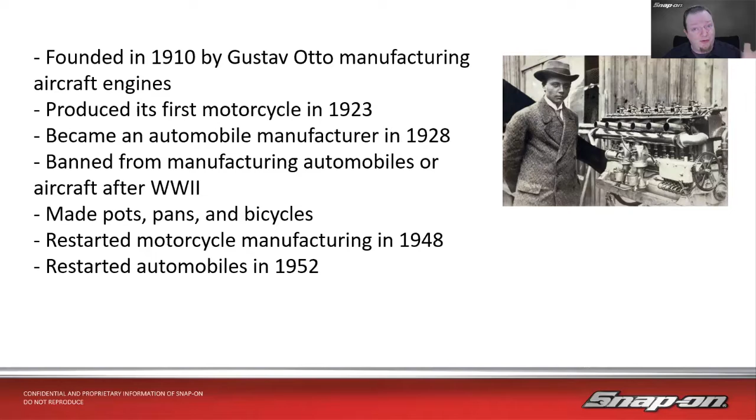It wasn't too long after that, though, only 3 years after the war was over, that they started motorcycle manufacturing again in '48. Then 4 years after that, they restarted automobile manufacturing in 1952. They still manufacture motorcycles and automobiles to this day.

Now let's talk about some of the models that we would be familiar with now. We're not going to talk about things like the 2002 from a ways ago. We'll talk about the ones we can currently see, and if you wanted to go to the dealership you could buy. Things like the 5 Series were actually introduced in 1972, the 3 Series in 1975, 6 Series in 1976, and the 7 Series introduced in 1978.

Of course, there was the X Series in there too, those are fairly newer. And then the 3 Series split off into the 3 and the 4 Series, maybe mid-to-late 90s, early 2000s. I don't remember exactly when it was, but it was 20-something years ago they split off there.

Also, they own Mini, so Mini Coopers, and Rolls-Royce. So you get your itty-bitty Mini up to like a really fancy Rolls-Royce, and anything in between, that's your BMW. Owns all of that. So some interesting little history there.

Some top models, this is based on North American sales because that's what we have the data for, over the last 10 years. Out of the three brands we've done so far, this is the top European manufacturer. But as far as sales numbers, we're not nearly anywhere near where we were with Toyota and Ford. The number one selling model was the X5, almost 600,000 over 10 years, so that's less than 60,000 a year. All the way down to the 2 Series, 94,000, and even the 7 Series, which has been around since the 70s, at 95,000. That's less than 10,000 a year for those on average.

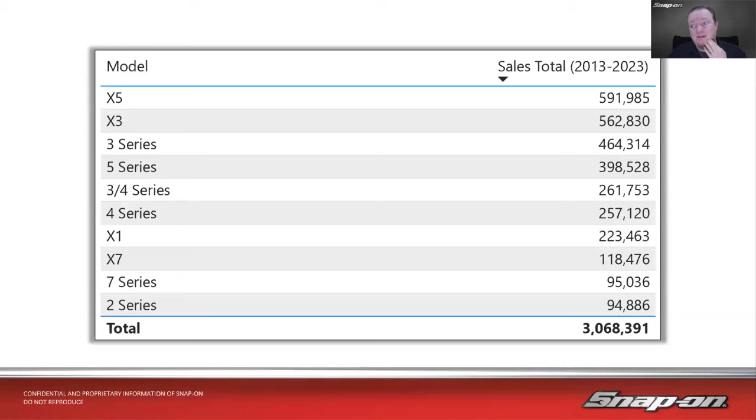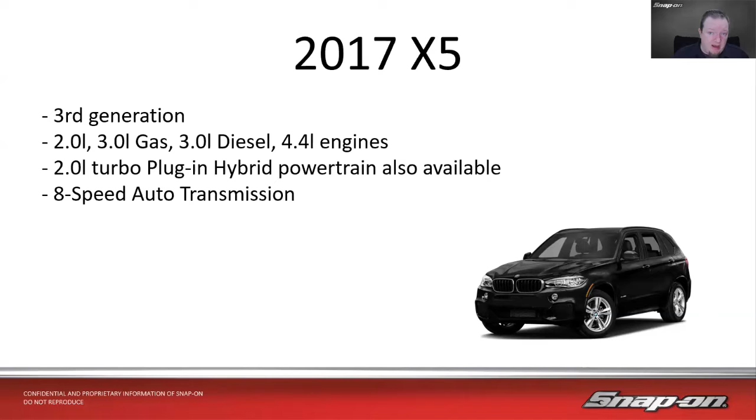So I picked out some representative models, kind of where they were at their peak over the last 10 years. The 2017 X5 was one of them, near one of the peaks there. The 2017 X5 was the third generation. It has a 2-liter and 3-liter gas, a 3-liter diesel, and a 4.4-liter engine. There's also a 2-liter turbo plug-in hybrid powertrain available, which was fairly new in 2017. 8-speed automatic transmissions is what that came with, no manual option to speak of, and of course the hybrid would have a hybrid type powertrain, not so much as a transmission.

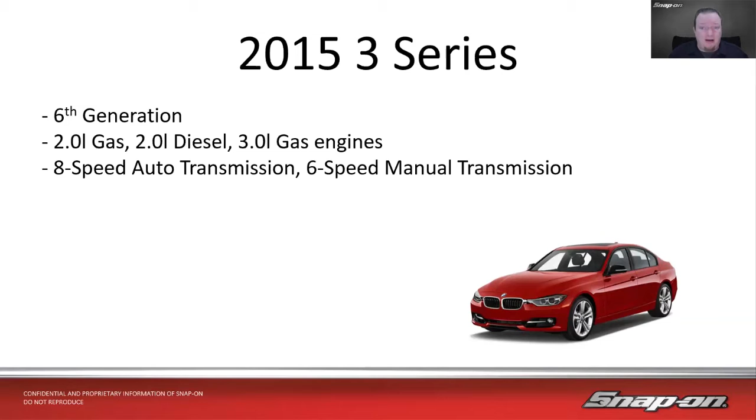2015 3 Series was another kind of peak year for that, 6th generation 3 Series. 2-liter gas, 2-liter diesel, and 3-liter gas engine. The 2-liter and 3-liter gas engines would be pretty much the same ones you'd find in the X5, so there's really not a lot of variables in between them. 8-speed automatic transmission and a 6-speed manual was offered there as well, and that's getting rarer and rarer, as I'm sure you know. Actually read an article the other day that said here's the list of vehicles you can still get with a stick shift, and it was a decent list still, probably a couple dozen vehicles that can still be had with it, but way less than it ever used to be for sure. So that's good to have.

And then 2016 7 Series. I picked this particular year because it was the highest North America and Europe sales volume of that year. It was 6th generation of the 7 Series, got a 3-liter, 4.4, and a 6-liter engine available, 8-speed automatic transmission. And as I said, the highest North America and European sales volume that year for the 10 years covered, of course, and to say it was the highest, it's still only not even 13,000 - it was 12,000 and change in each market. They weren't that far off, a couple hundred either way between North America and Europe, so probably a lot of factors involved in that.

I would imagine the first one's probably the price, because that's one of the top tier series for BMW, so I would imagine that's where all the fancy stuff comes in. You've seen the pictures of the new ones with the giant screen that goes across the whole back - yeah, it's a 7 Series. So all the high tech stuff, that's where it goes first, and usually it trickles down. So yeah, that's their top of the range, and that would be why I would imagine 13,000 a year at the peak.

So let's look at some common issues we've run into here, looking at the information available. Many occurrences of misfires, seems to be a lot of them on, say, the 3-liter, the N52s and such. They actually had a TSB back in the day that said, hey, if you find Bosch coils in these cars, you need to replace them with Delphi coils because we got a problem with the Bosch coils. So a lot of coil issues, misfire issues strewn about. EVAP issues we're going to see on pretty much any of them, and I think that's really across the board, doesn't matter what the manufacturer is. A lot of EVAP issues just in general, just because there's a lot of moving parts, so to say.

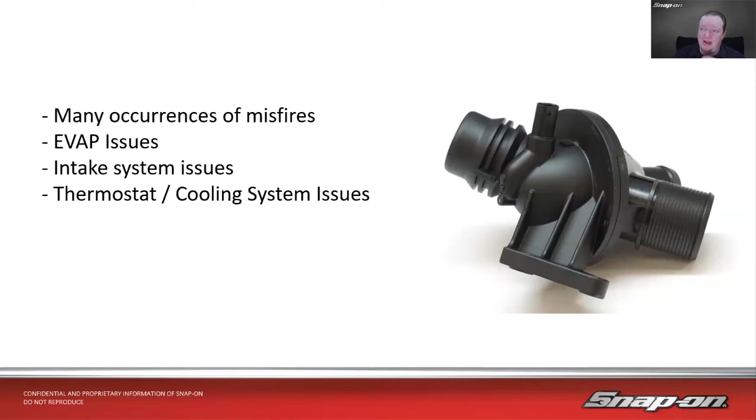Intake system issues from the intake manifold all the way down through the valves, and we'll see why when we talk about some specifics. Also a lot of thermostat and cooling system issues. They have an electric thermostat, a heated thermostat, they call it map cooling. We've talked about it before in one of these classes, but they set a fair number of codes on that, so that's what you're going to run into.

So here are some common codes. This was based off the top 3,000 some odd codes that we get on the scan tools that people have asked for more information on. Usually I try to get the top 10 from any manufacturer. BMW actually really only had 9 across the board, but close enough.

We can see things like throttle, boost pressure, charge air pressure control, variable cam timing, throttle valve, mixture control, intake, variable cam control, variable camshaft timing control. So a lot of those intake-type codes.

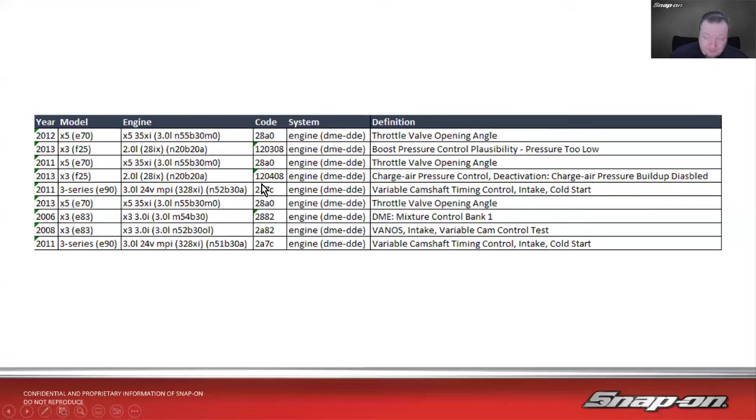Another thing you'll notice is that BMW will often present to the scan tool in a hexadecimal code format. They use hexadecimal, they use decimal, and they also have conversions for P codes, B codes, C codes that we'd be used to. But it actually presents it - the factory tool would present it through the Snap-on tool as that hexadecimal as well. Most times, sometimes you'll get into P codes, but more than likely it's going to be that hex code. So just be aware that that's another little oddball, unique thing with BMW.

Some OEM specific features, and this is where we come into some technology stuff. Valve train control, a lot of valve train control.

So this is Vanos, and what that does is your timing advance, oil controlled and all that. They do it pretty similar to how other manufacturers do it, so this isn't exactly the most exclusive one, but how they do it is kind of proprietary to them. It's not that different, but there are some interesting things that can be done with it, like there's a timing chain test in there - you can see how stretched your timing chain is, which is kind of nice, through the scan tool. We'll talk more about that in a little bit, but that is one of the things we're going to talk about, the Vanos.

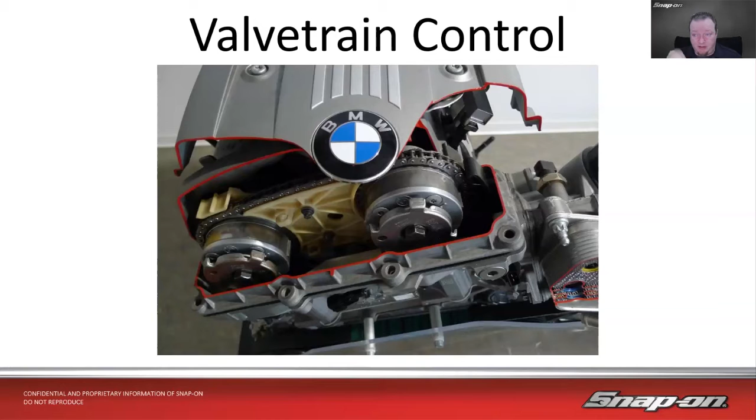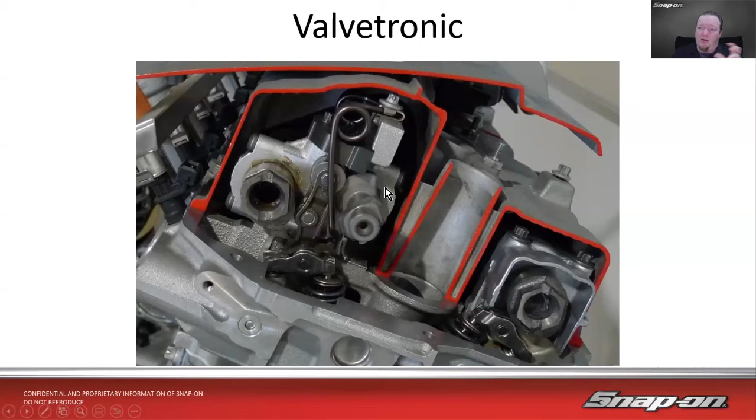You may see the word Valvetronic on the scan tool every once in a while. This is another thing - the first one was cam timing, valve timing. In this case, this is valve lift and duration, as to how far it can lift it. It's got these stepper motors in there and a little eccentric that will push on the rocker in a different way depending on where it's at. So here's one way fully retracted and here's the other way fully out, and what it does is press on the valve more or less depending on where it's at.

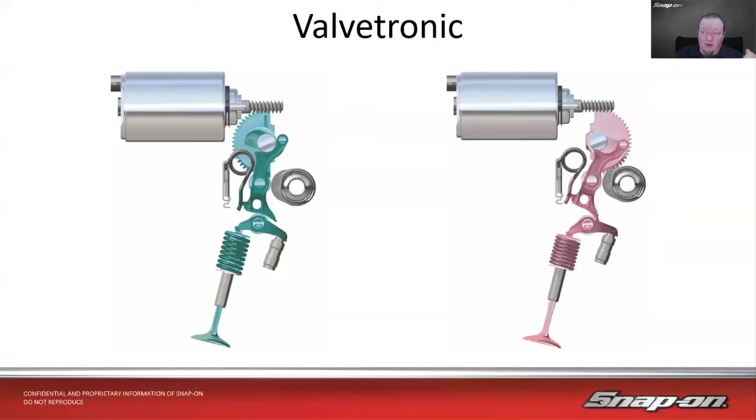We've got a little animation here that shows the little eccentric on that side. So that's one way, it's slightly opening, and then if it turns again, it won't open at all. If we turn kind of in the middle, it slightly opens, and then all the way the other way, it opens very large. Depending on where that's set, there's electronics in a solenoid that moves it around in a worm gear, and that's how that works. The cam doesn't change profile - it's the lifters and rollers, the rockers that ride on the camshaft, and depending on where it's at, that gives us the different profile for lifting those valves. That's certainly unique to BMW, I don't know anybody else who does it that way.

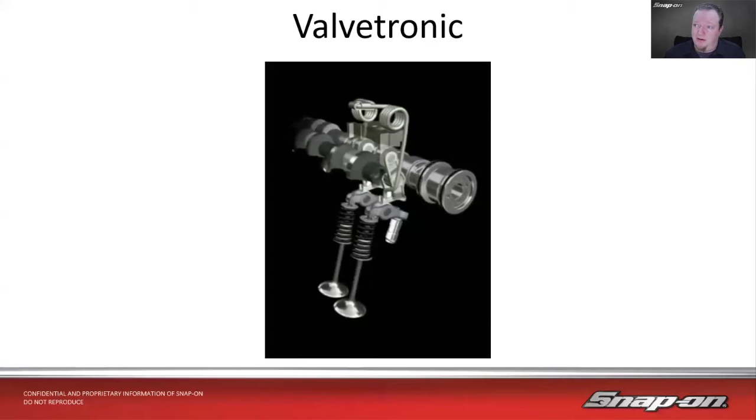They also have two different types of variable runner intakes - an older version and a newer version. The older version was DISA. You may have heard of that before because they had a fair number of problems with those as well. It's a multiple runner intake - there's your throttle, and then inside the intake we have these two valves. Under low RPM, it gives me the longer runners so I can get better torque, and then at mid-range it kind of opens up this middle section so we can have flow go through and do some more scavenging there.

And then at high RPMs, we max out, and then we can actually scavenge more from other cylinders as well. This gives us short runners, which allows it to work properly at a higher RPM. So it'll vary torque depending on the load.

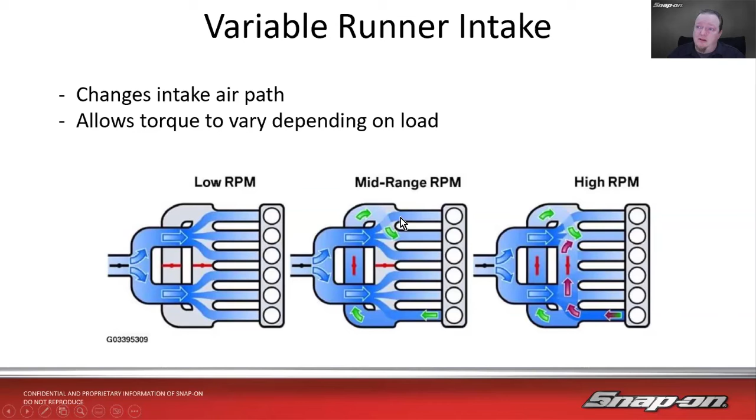So that's DISA. And now we also have DIVA, which is infinitely variable. It kind of looks like a shell on the outside, a curvy thing. Then there's another curvy wheel that goes on the inside that can rotate around this center, and it opens and closes that intake based on the driving parameters of the engine at that time. But it is infinitely variable.

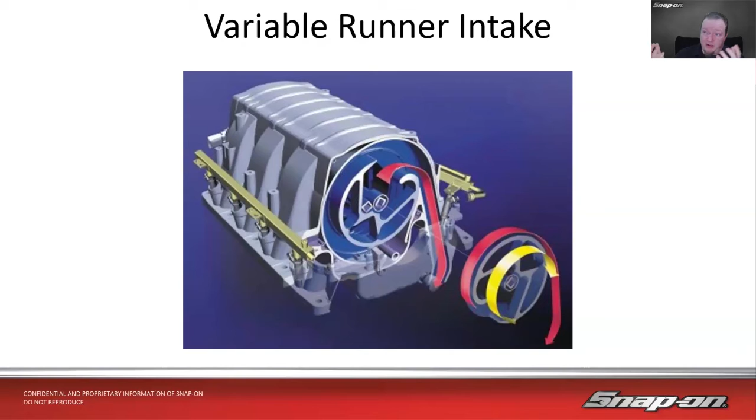It's not like the DISA where it's kind of open or closed. In this one, it can be any sort of length they want, within the parameters of how long it is. It can go from quite short to very long, depending on how they have that in phase with each other. There can be some failures on that, and there are some scan tool functions.

Another thing to be aware of: round about OBD2 time, 1996, the Europeans didn't have it really specified out back then. It took them until the early 2000s to get everything worked out. So you will find between '96 and '03 or so, BMWs with two connectors - the 16-pin connector under the dash if it's a US spec vehicle, but also under the hood you will have their factory 20-pin connector as well.

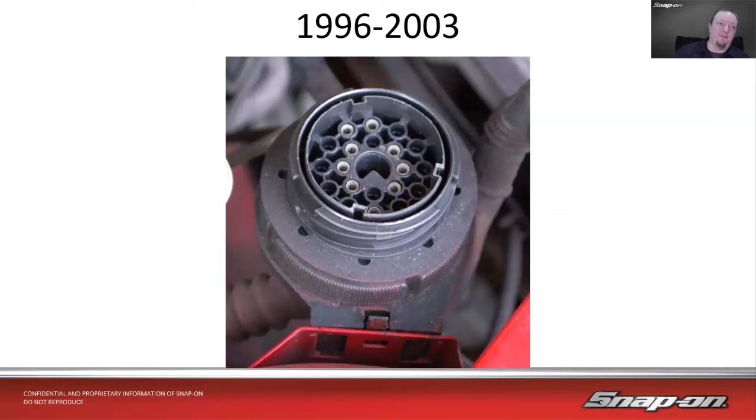And depending on what system you need to get into, it may ask for this other connector. So just be aware if you have an older BMW, '96 to '03 ish, it may have both connectors - one's under the hood, one's under the dash.

All right, now on to our tips from a tech segment. I talk to one or multiple techs who have or currently work on these vehicles, and they just have those little nuggets from working on them for so long - oh yeah, when this happens, check this type of thing, right? Those are the kind of things we would look for when we're not familiar with a brand and we get a weird problem.

So misfire diagnosis - remember how I mentioned earlier that misfires are fairly common? They also had a bulletin on a couple of them saying if you see these Delphi coils, just replace them with the Bosch coils, because that's just going to be the problem.

But another thing that happens is due to the DME - that's their acronym for ECU - due to the logic in that, if a misfire is detected, it will shut down the entire cylinder. So the injector and the coil will just shut off and not be controlled at all, which can create a challenge when trying to diagnose a misfire the traditional way.

If I'm trying to test the injector and the injector is not being turned on by the computer, well, the injector's not working - is it a problem with the injector, or a problem with the computer? Well no, actually it's working as designed. So you may have to check it some other way, maybe with resistance or something of that nature. It does create a challenge when that happens.

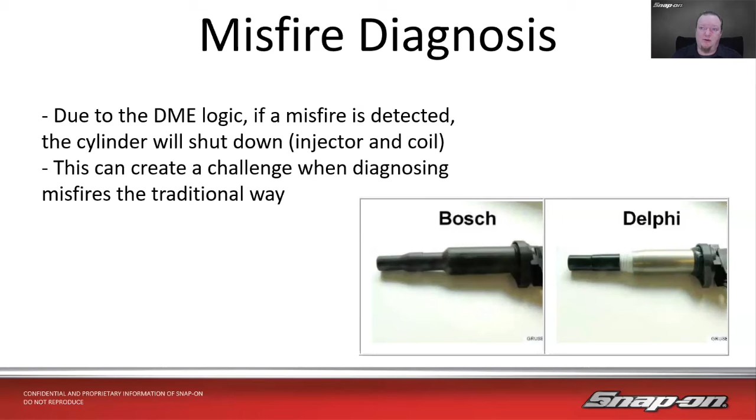Some manufacturers do this, some don't - in this case, it's something they do with their logic. How about measuring oil? A lot of them don't have dipsticks anymore. Mercedes is a culprit of this too - they decided customers don't need to check their oil, apparently, I guess.

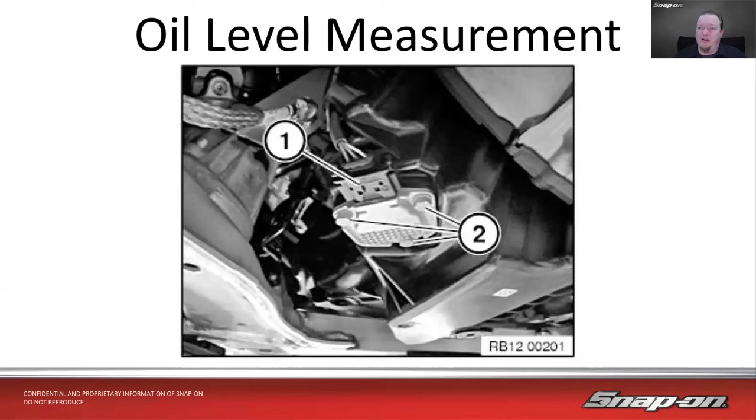I don't know who made that decision, but oil level measurement is done by a PID. So you'd have to go into data stream and look at a PID. I'm sure there's probably a display somewhere on one of the screens in the car too, but to actually see how much oil is in the car, in this case I see 22.27 millimeters - is that okay? I don't know what the spec is for how many millimeters of oil are supposed to be in the pan. So that's yet another over-engineering challenge you may run into.

So, hey, where's the dipstick? Oh, it doesn't have one. You've got to check the PID.

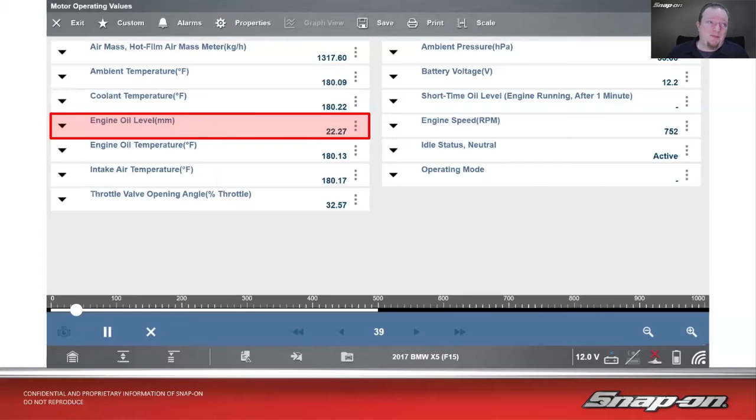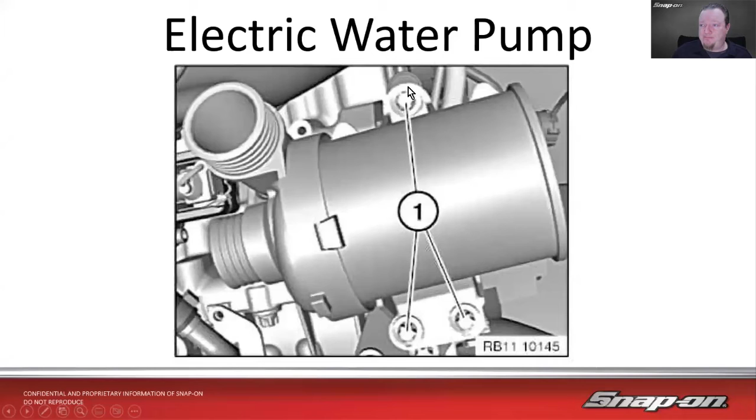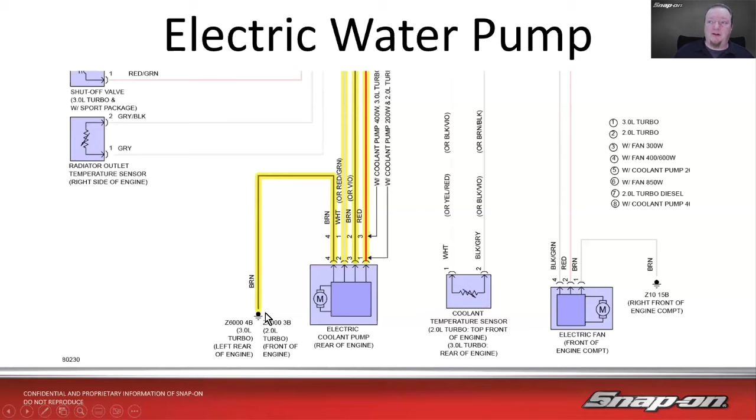Another issue we can have is many of these now have electric water pumps on them, which can cause some of their own issues in their own right. You see it's held in with these aluminum bolts, right there inside maybe a steel piece. But what happens is the ground for this is also on aluminum, and those aluminum bolts tend to back out sometimes. So I could have a problem with my electric water pump, and if I don't double check this ground to make sure it's good at all times and torqued down properly, it may be loose or intermittently loose, and I could replace this water pump not knowing that the ground is actually the problem. So that's another thing to look for.

Now let's get to OEM specific scan tool function. So, engine related tests - remember how I said we've got this complex engineering in this engine, so there's a lot of different tests specific to it. Cooling system ventilation, that's with the electric water pump, so that'll help bleed the system. Injector coding, especially on the direct injection motors, you have to type in a code for each new injector when it gets replaced.

Starter exchange - when you change the starter, there's actually a couple things you need to do. You need to be able to unlock the starter as well, so starter interlock for it, which we're going to talk about in a little bit. But starter exchange, you can go in there and it'll reset the number of engine starts available on the starter. You can also start up the Valvetronic system.

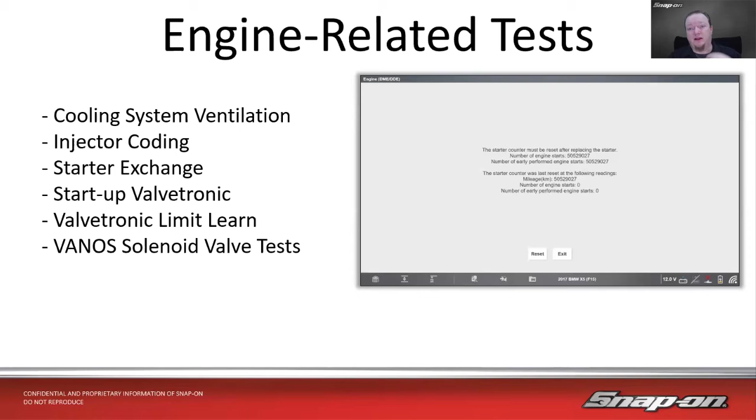If you do work on the Valvetronic system, it'll go over, do some configuring, and start itself up. Valvetronic limit learn - it'll know the limits of which way that eccentric shaft can go if you do any work once again. VANOS solenoid valve tests - you need to be able to check the solenoids on those, and there's some tests for that. Like I said, there's also a timing chain stretch test on a couple of them.

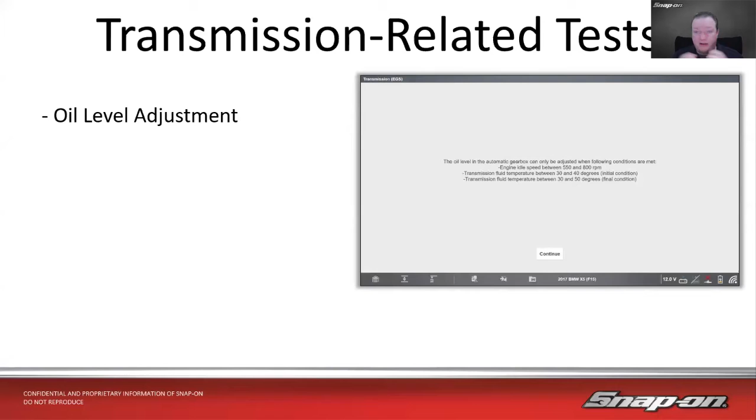So a lot of things need to be done using a scan tool. As far as transmission related goes, oil level adjustment - if I need to do any sort of repairs to the unit, whether the electronics, the gears, or what have you, you have to go in here and actually do this test in order to adjust the oil level.

Other tests, for example, that reset starter interlock I just mentioned - if I do any work, if the vehicle is not starting, if I replace a module, or if one of the modules has been removed, or if the vehicle's battery has become discharged or dead, you need to do that reset starter interlock to allow it to start again. So you may run into a no start issue that's not actually anything to do with the engine or the battery even - it's actually that we need to do this procedure.

Also, initialize new headlight driver module and teach in turn indicator. So if I change headlights or signal marker bulbs, I need to relearn those into the vehicle as well, so there's a function for that. Also in this car, not necessarily specific to BMW, they have an active sound design module with microphones and speakers throughout the cabin that plays anti-sound, out of phase sound, to quiet down the sound in the cabin. So that is a thing that is available as well.

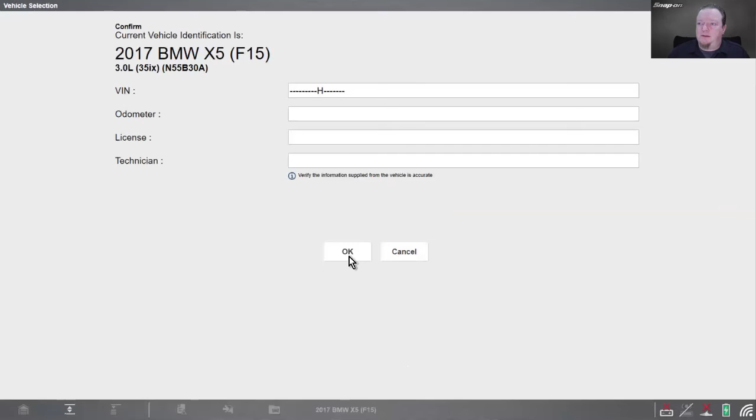All right, let's do our live little walkthrough on the tool and see what we can find. I'll start on the X5, and see what we can see. So let's go into the engine.

And we'll go to functional tests and special functions. We can see quite a few special functions. Didn't even mention the battery - that's not exclusive to BMW, it's fairly common across European makes, but when you replace the battery, you do need to do a reset relearn.

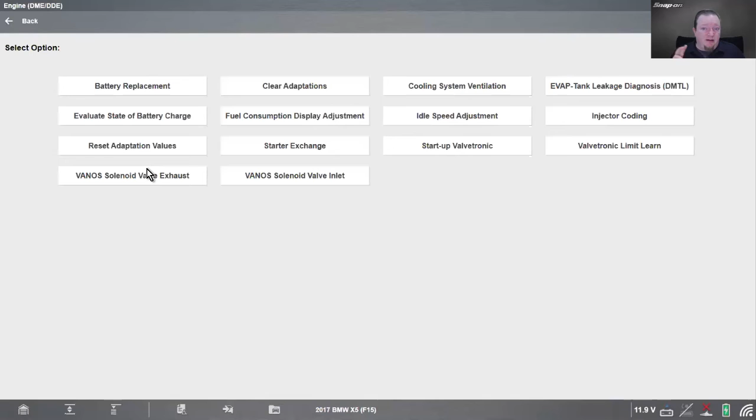Clear adaptations, cooling system ventilation - that's the coolant bleed. Tank leakage diagnosis for evap, that actually pulls on the vacuum pump and allows us to test that way. Idle speed adjustment, injector coding once again if I replace the injectors. Starter exchange, that's where it resets the starter counts. Startup Valvetronic limit learn. VANOS solenoid valves for the intake, and that'll actually open and close them as well.

Let's go to transmission.

When I go in here, we can see under the functional test, special functions, an oil balancing. The oil level in the automatic gearbox can only be adjusted when certain conditions are met. Why does the oil level need to be adjusted? Either a fault is stored in the transmission for an oil level check, or the mechatronics or converter have been replaced, or other parts have been replaced, not the mechatronics or the converter.

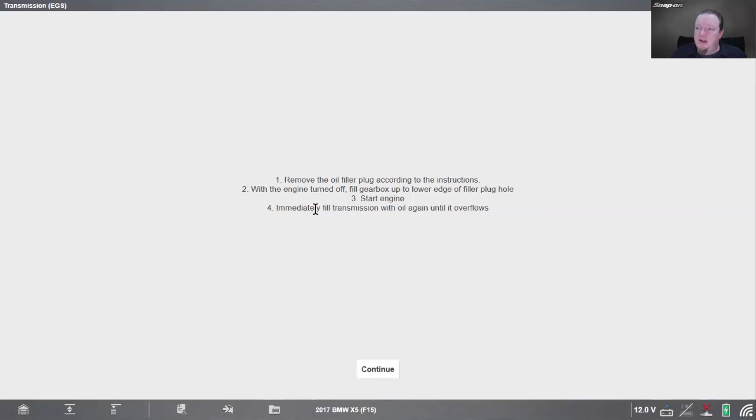You just go in there, raise the vehicle on a hoist so the wheels turn freely, and apply the parking brake. Remove the oil filler plug according to the instructions, with the engine turned off, fill the gearbox up to the lower edge of the filler plug. Start the engine, and immediately fill the transmission with oil again until it overflows. Sounds nice and messy.

And then it'll go through that, and I guess it must kind of burp it, and allow it to do that. Depending on what kind of work you've done on the transmission, it'll do it differently between those.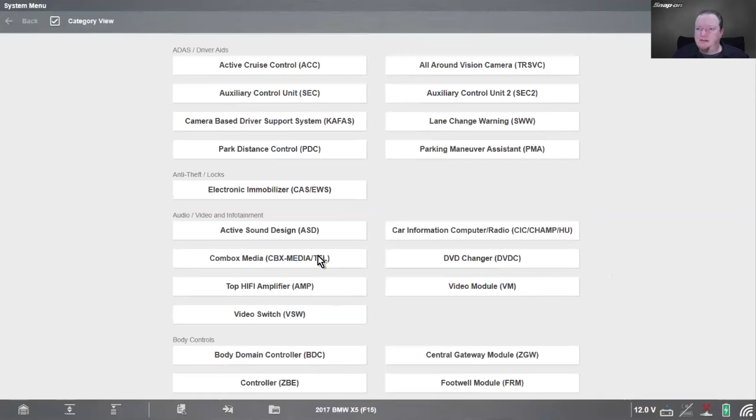All right, and then what was the other? There's that active sound design again. Body domain controller.

So there's a functional test under special functions in there to reset the starter interlock like I talked about before. Only carry out this function if the CAS, FEM, or BDC has been replaced, or if the vehicle is not starting. This procedure may also need to be executed if any of these have been removed or the vehicle's battery has become discharged. Do you want to carry out the procedure?

Sure. And then it's going to go through and walk you through how to do it. It may or may not error out on me here. Let's see. There we go, reset successfully. Switch off the ignition, and we're back.

There's another one where we can force sleep mode on the body control module as well. If I'm trying to diagnose a draw or something like that, I can put the modules to sleep so I don't have to worry about having them awake for hours.

All right, let's go look at some real world information. So based on, like I said, they weren't huge sellers in this year. 39,242 repairs for the 2017 X5 with a 3 liter, 35i.

So we see pads and rotors, that's pretty common, right? Spark plugs is fairly high, like I said, a lot of misfires. EVAP, coolant thermostat. What's this one? That is EVAP, I believe. Let's see. Yep, EVAP.

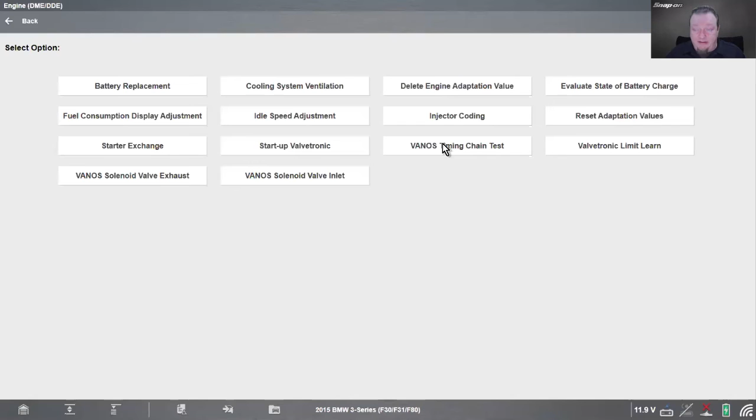If you watched last week's class, it actually walked through it as well. But it'll tell you how much it's stretched, how many degrees it's off, or what have you. So that's good to know if I need to replace the timing chain. Is the timing chain stretched? It can actually go in there and give you a result at the end.

Vanos solenoids, Valvetronic again, starter exchange again. So all those things that were in there before.

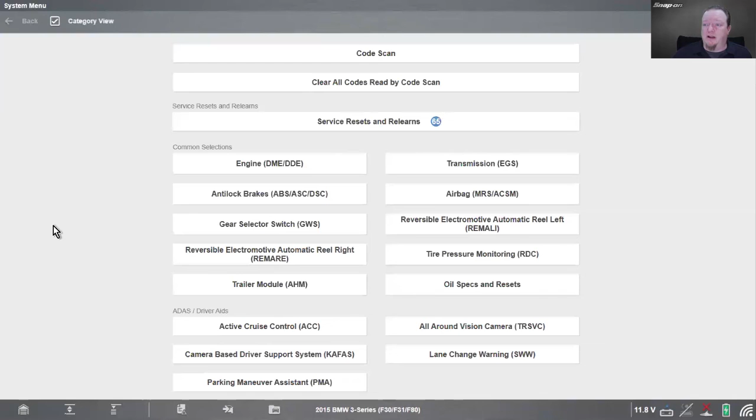Let me look in the transmission real quick. Yeah, so that's going to have the same functional oil balancing. Actually, if I change transmissions, we go with this one, that's got a fluid adjustment and an oil balancing. So it just kind of depends on the transmission you got in there, and the tool will know based on the vehicle.

All right, let's go to SureTrack again. Take a look at this 328i. Okay.

Okay, we see 48,000 repairs in this case. Pads and rotors, battery, spark plug, headlight bulbs - that's kind of high. Thermostat, cooling system - those are kind of high too, I would think. There's a thermostat code, and I think this first one is as well.

Let's see - OEM testing. Thermostat, heater, control circuit open, right? So it's got the map thermostat, it's got the heated thermostat in there.

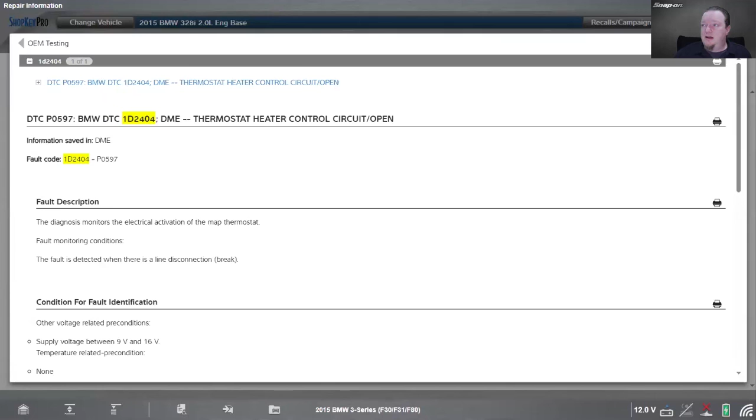So looks like there's a fair number of failures on there where I'll get a code for it. First, the top 2 codes are for the thermostat, and then 2 lean, evap, oxygen sensor down here, coolant thermostat again. So yeah, lots and lots of thermostat issues - thermostat over here, oil leaks, engine doesn't start again, runs rough, fluid leaks.

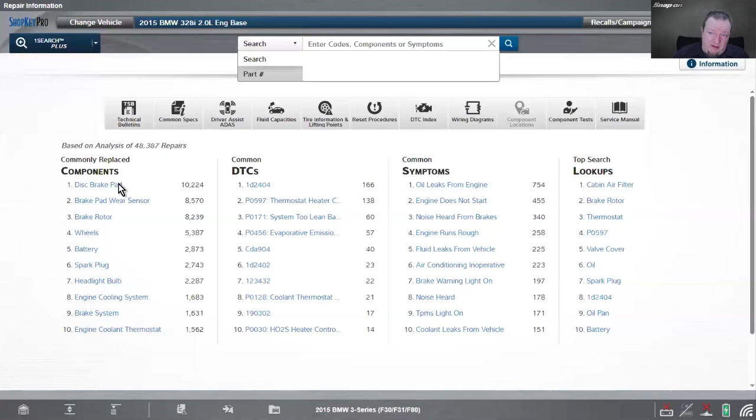A lot of very similar things across the board there. Cooling system, like I said, coolant thermostat - a lot of those. And then finally, we'll get to our 7 series. Like I said, only sold 12,000 and change of these.

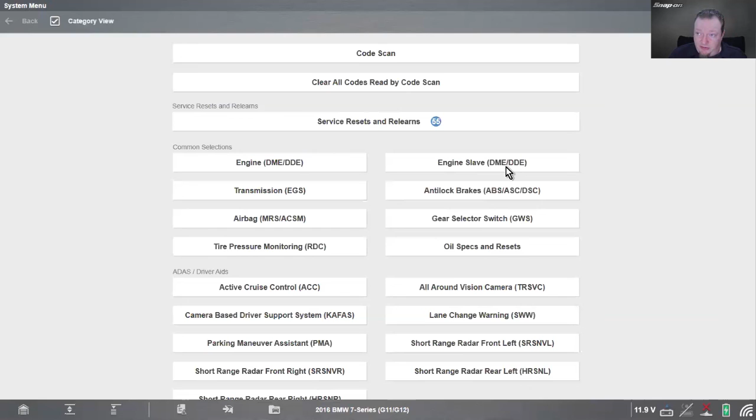In US and 12,000 and change of them in Europe. Also on this particular engine, it has a master and a slave engine controller, so there's actually 2 engine computers on this vehicle. So you need to look inside - if you can't find it in one, it might be in the other.

So there's the example. I got seven different functional tests in there. But if I go into my slave and see the functional tests in there, I got 2: fuel pump and adaptations. So I didn't see reset adaptations in the other one, I don't think. That's just, like I said, you got to go through it and see what's there.

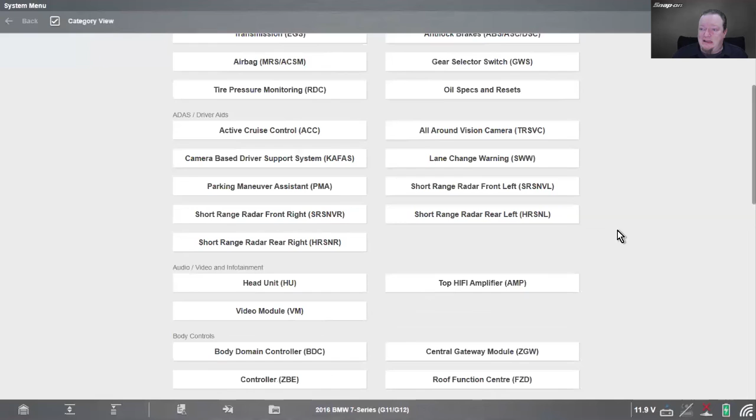Let's see. Yeah, I think that'll do. All right, now let's go into SureTrack.

Oh, gotta log myself out - logged in too many times. All right, so there we go. Like I said, 1,700 repairs logged. So not a ton, but that's just because it's not that common a car. Because remember, it was across the board on all of them - it was about 12,000. So this is 1,700 on a 750i.

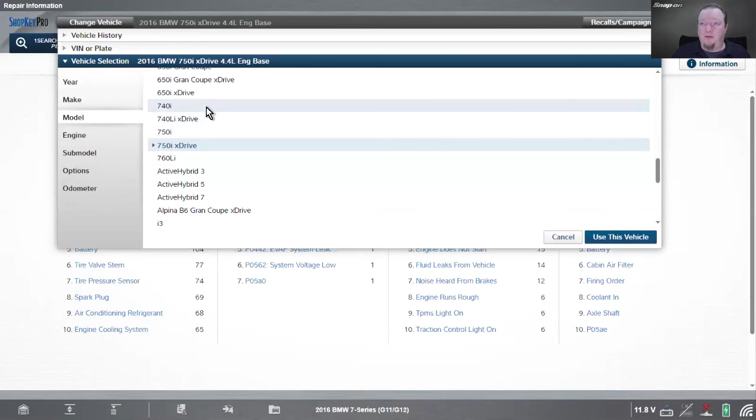What if I change my vehicle? Maybe I change it to 740i - then what do I see? The 3 liter, that's 1,026. And then if we go to 760 Li, you can see that's 4, right? Didn't sell too many of those. I mean, obviously they sold more than 4, but it's not that common.

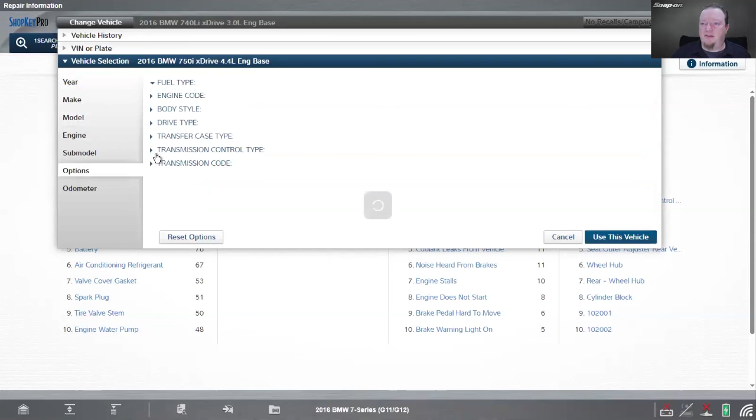You can tell just by going through the different engines and the different models as to what are the more common vehicles versus the least common. That's 1,121, that one. So let me go back to my other one where I started - I think that was a 750i xDrive. There you go, 1,731, like I said.

Pads and rotors, brake wear sensors, battery, AC refrigerant - that seems kind of high. AC inop, that's pretty high. Coolant leaks, coolant thermostat, cam position, evap.

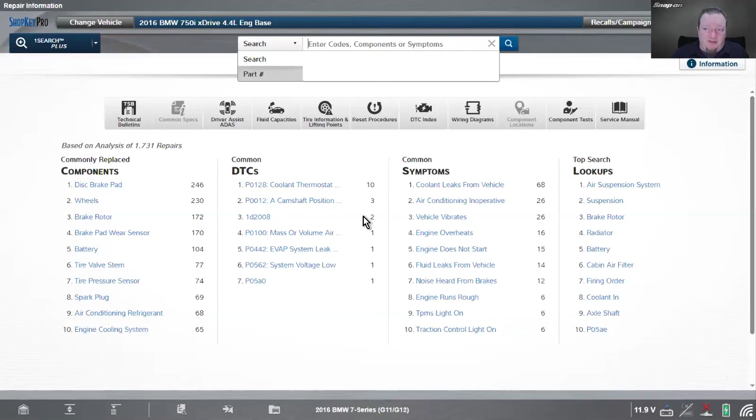I think that was one of the heater codes too, right? Actually, that one didn't show up. All right, so it's all in the onesies and twosies down here as well, right? So kind of depends on where they're going to bring it to - they're going to bring it to an aftermarket shop, or they're going to bring it to the dealer. Pay that much for the car, you might end up bringing it to the dealer too.

So that's pretty much that - that's going to cover it. Hope you picked up some tips and tricks on some of the unique, oddball things when it comes to a BMW. And with that, that is our time here today.